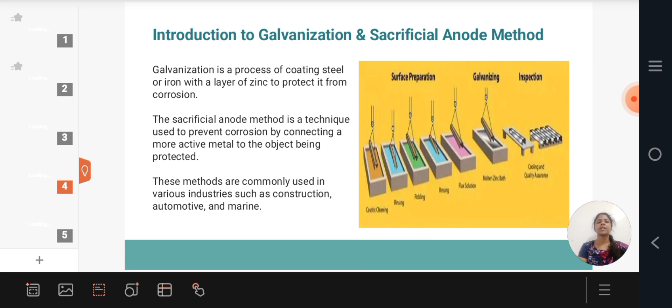Introduction to galvanization and sacrificial anode method. Galvanization is a process of coating steel or iron with a layer of zinc to protect it from corrosion. The sacrificial anode method is a technique used to prevent corrosion by connecting a more active metal to the object being protected. These methods are commonly used in various industries such as construction, automotive, and marine.

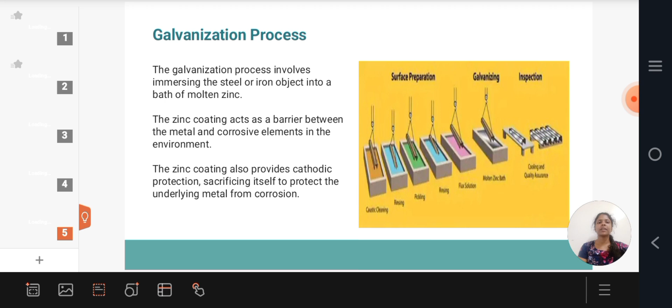Galvanization process. The galvanization process involves immersing the steel or iron object into a bath of molten zinc. The zinc coating acts as a barrier between the metal and corrosive elements in the environment. The zinc coating also provides cathodic protection, sacrificing itself to protect the underlying metal from corrosion.

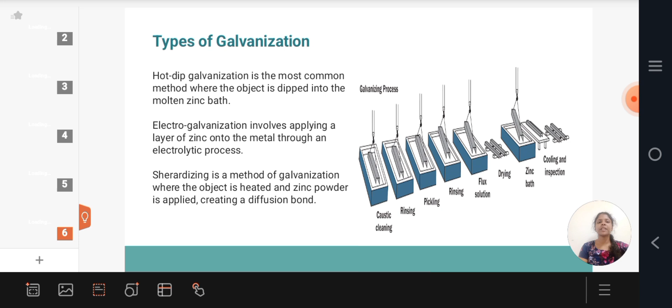Types of galvanization. Hot dip galvanization is the most common method, where the object is dipped into the molten zinc bath. Electrogalvanization involves applying a layer of zinc onto the metal through an electrolytic process. Sherardizing is a method of galvanization where the object is heated and zinc powder is applied, creating a diffusion bond.

Advantages of galvanization. Galvanized coatings provide excellent corrosion resistance even in harsh environments. The coating is highly durable and can withstand mechanical damage. Galvanization is a cost-effective method as it extends the lifespan of the protected object, reducing maintenance and replacement costs.

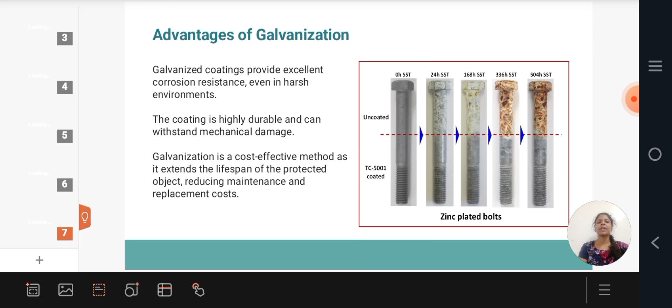Sacrificial anode method. The sacrificial anode method involves connecting a more active metal such as magnesium or aluminum to the object being protected. The more active metal corrodes, sacrificially protecting the underlying metal from corrosion.

How sacrificial anode works. When the sacrificial anode is connected to the object, it creates a galvanic cell. The more active metal becomes the anode, corroding sacrificially. The protected metal becomes the cathode, preventing corrosion. Here we can see the diagrams.

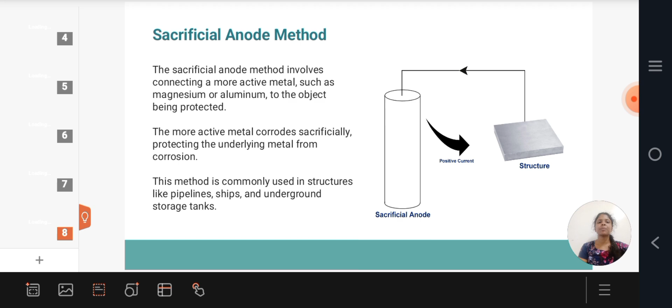Types of sacrificial anodes. Zinc sacrificial anodes are commonly used in marine environments. Aluminium sacrificial anodes are effective in soil or freshwater applications. Magnesium sacrificial anodes are used in highly conductive environments such as saltwater. This method is commonly used in structures like pipelines, ships, and underground storage tanks.

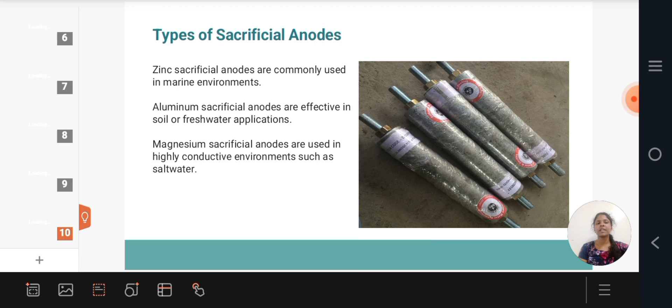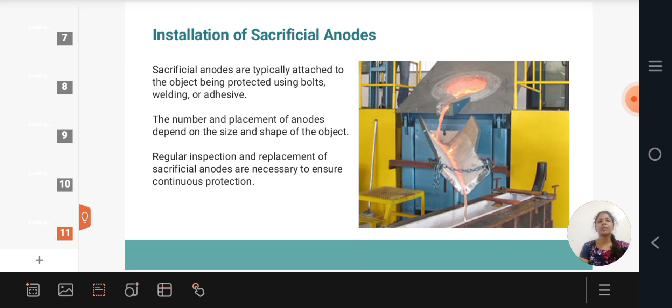Installation of sacrificial anodes. Sacrificial anodes are typically attached to the object being protected using bolts, welding, or adhesive. The number and placement of anodes depend on the size and shape of the object. Regular inspection and replacement of sacrificial anodes are necessary to ensure continuous protection.

Advantages of sacrificial anode method. The sacrificial anode method provides active protection against corrosion. It is a relatively simple and cost-effective method compared to other corrosion prevention techniques. The sacrificial anode method can be applied to both new and existing structures.

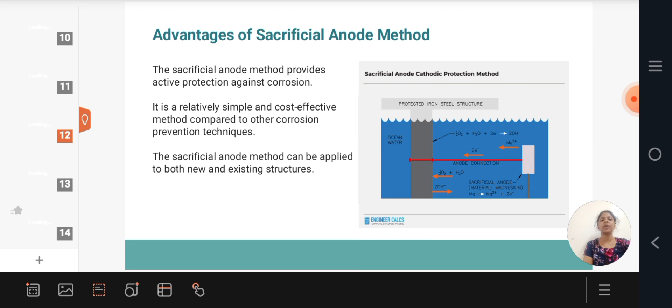Summary. Galvanization and the sacrificial anode method are effective ways to prevent corrosion. Galvanization involves coating steel or iron with zinc, providing a barrier and cathodic protection. The sacrificial anode method uses a more active metal to sacrifice itself and protect the object.